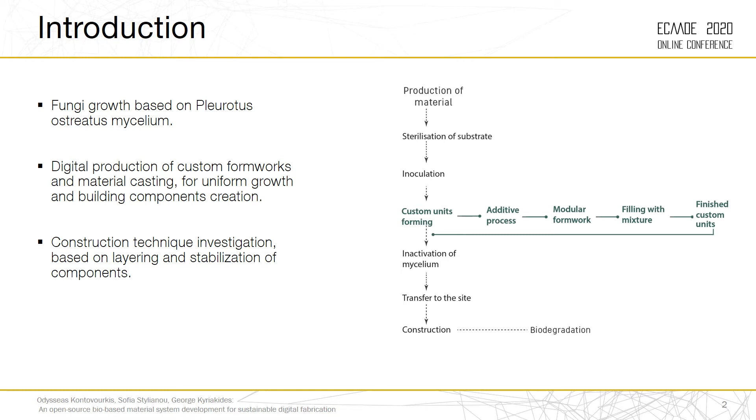The study was initiated to research how mycelium structures could serve the needs of an environmentally conscious approach in protected environments. The general concept of reversibility of design in natural landscapes is vital for the endangered species of fauna and flora in these areas. It's important to understand the production needs of the material and the life cycle that follows, so that future designs can adapt to the process and be optimized. This work attempts to fill this gap by presenting an open-source mycelium-based material system development, discussing at the same time digital fabrication and construction techniques involved towards a comprehensive and sustainable design-to-construction workflow.

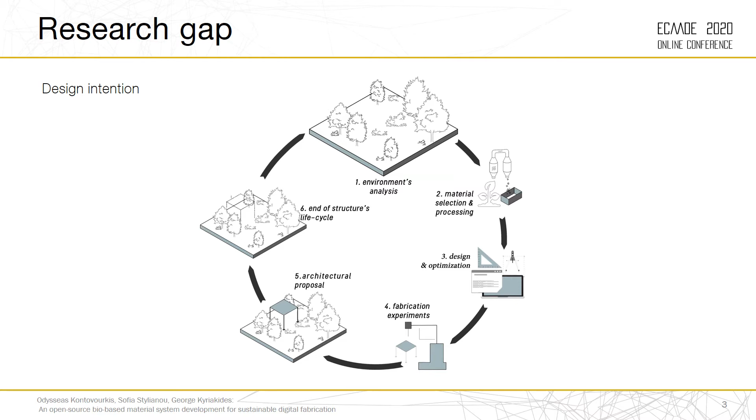A quick introduction for those not familiar with what mycelium actually is. We're referring to the vegetative part of the mushroom, which consists of a network of fibers. In nature, these fibers grow above and below the ground, and the mycelia, known as honey fungus, is the greatest living organism on Earth. It is well known how valuable it is looking into nature to follow its examples and material properties in order to use them as potential design drivers of form generation. So the selection and production of material is a result of the natural process of mycelium growth, where it is used as a natural glue to transform agricultural waste into an innovative construction material.

Primary property of the material is its biodegradability, which occurs after the exposure to high humidity levels, releasing nutrients to the soil. There are a number of steps needed to develop the material. These include the production of material with pasteurization of substrate and inoculation, then the custom units forming based on an additive process of material growth in a certain period of time and under specific environmental conditions, then the inactivation of mycelium and its transfer to the site for assembly in the form of custom brick units, and finally the end of the material's life cycle that acts as a natural fertilizer on site in an attempt to offer the material back to nature.

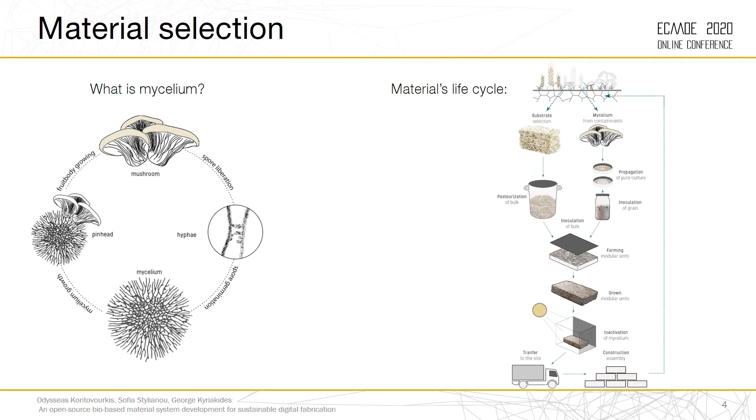Mycelium itself is a hydrophobic material. This means that if it was used with no other additional substances, it will have a life cycle of centuries. However, since the substrate is not fully colonized with mycelium and it has direct contact with water, this physical property is invalidated. So when the material absorbs enough amount of humidity, its biodegrading process begins, the bonds holding the substrate together as solid break, and eventually the construction is dissolved. We have conducted some experimentation to see the material being most radically dissolved within the first 3 to 4 hours and then continuing to biodegrade in the following 1 to 2 days with a slower rate.

However, the mycelium structures are expected to have a different behavior. Following the suggested structural element dimensions and stacking method analyzed later, the highest percentage of the material is not directly exposed to the humidity and rainfall, so the time to biodegrade will be significantly longer, which actually gives you time to run out of the building in a case of a rainfall. Just an estimation is that the structure would be considered unsafe after 3 to 5 days of heavy rainfall and merge into the environment during winter.

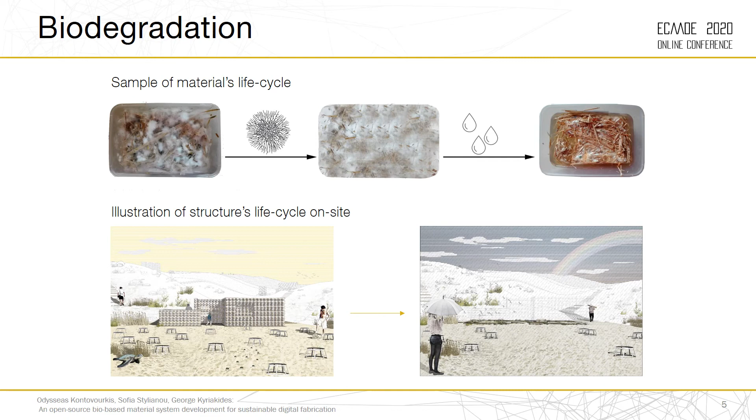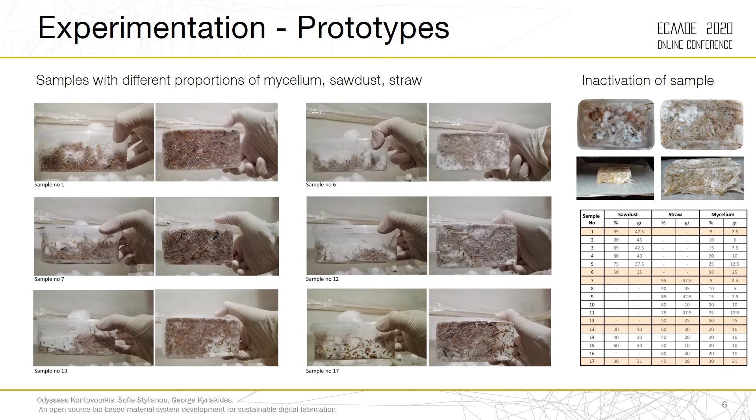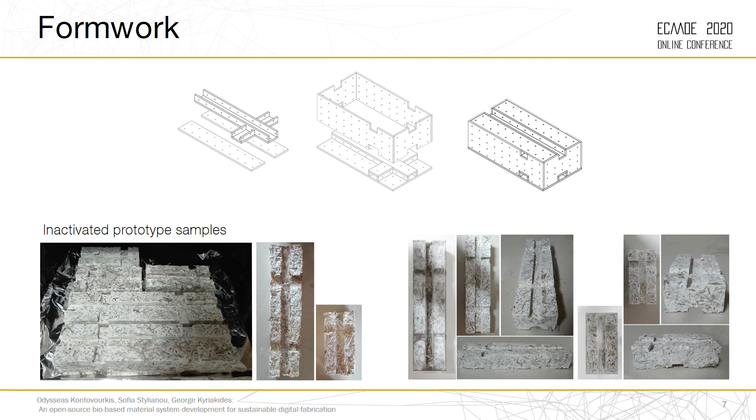Experimentation and prototypes production were conducted by setting up a low-tech installation. The installation included a clean room in order to reduce contamination risks due to the fact that the air is full of impurities. The substrate used for the experiment was straw and sawdust in different quantities. The initial samples consisted only of straw and had greater growth rate. Also, the samples with sawdust needed higher percentage of mycelium. Taking into consideration the production processes needed to produce mycelium and compare it with straw, that is pasteurized agricultural waste, the target is to use the minimum amount of mycelium that provides the product with enough compressive strength. Production of units is achieved through formworks that require the use of materials with low porosity and the control of access of air. This can be achieved either by using small holes evenly distributed or with a filtered opening.

The construction technique was design driven by the material's limitations, but also by the advantages provided by parametric design principles, so a variety of systems were produced based on a series of stacking arrangements. The suggested systems consisted of a double-layer wall for the stabilization of structures due to the highly lightweight nature of the material. The design of typologies includes notches at 3 positions, where supporting wooden elements are added to enhance stabilization and stiffness of the overall structure.

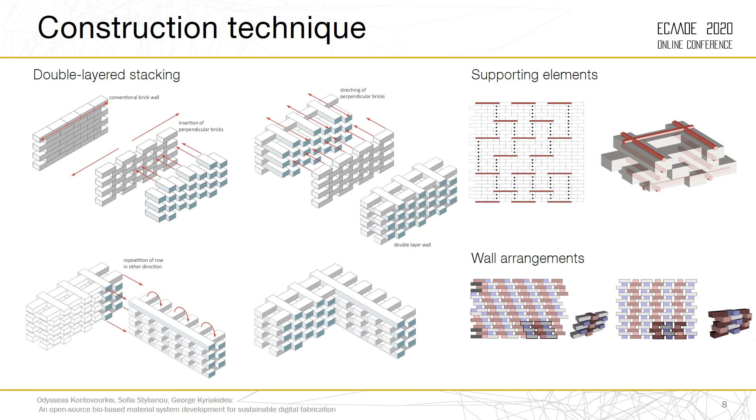The initial experiments and results obtained show great possibilities of their application in the construction industry due to the properties of the specific material and the almost zero impact it has to the environment. Obviously, issues can be discussed, which are related to the physical properties of the material and consequently its application as a structural element in the construction. The results suggest that due to its nature as a lightweight material with reduced compressive strength compared to other materials, it needs to be combined with supporting structures of reinforcement to achieve stability and rigidity.

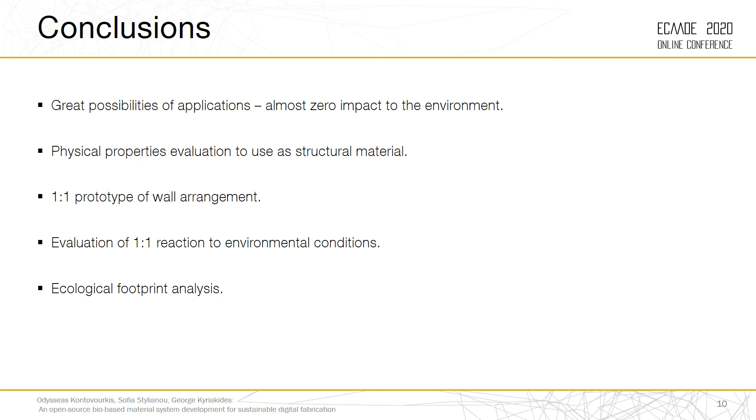The production of a number of elements required for a 1:1 wall arrangement prototype could highlight any inconsistencies in the material properties and reveal possible gaps in the suggested production and fabrication method. In that case, the reaction to water exposure and specific environmental conditions can be observed and evaluated. Also, more experimentation regarding its application capabilities and measurable results in terms of its ecological footprint can help towards further application and establishment in the construction industry.